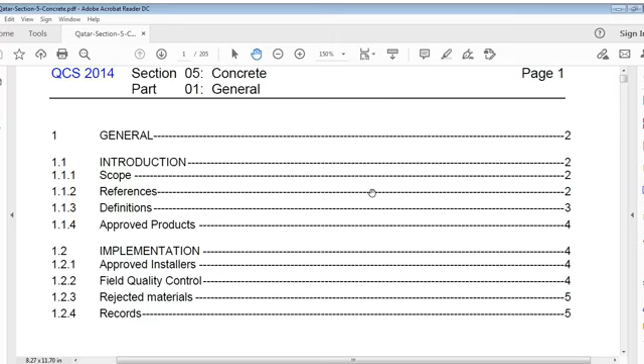This is the 2014 QCS, in which general introduction, scope, references, definitions, approved products, implementation, approved installers, field quality control, rejected materials, records, and then general are covered. This is part 1, section 5, introduction.

This is the scope. The section includes requirements for concrete work for pipelines, roadworks, runways, structures, water retaining structures, foundations and bases for structures and equipment. This part includes relevant standards, definitions, abbreviations and requirements for testing, facilities, rejected materials and record keeping, and related sections are as follows:

Aggregates, cementitious materials, water admixtures, property requirements, concrete plants, transportation and placing of concrete, formwork, curing, reinforcement, construction joints, inspection and testing of hardened concrete, protective coatings of concrete, hot weather concrete, miscellaneous precast concrete, pre-stressed concrete, water retaining structures, general quality assurance and quality control, foundations and retaining structures, roadworks, drainage works, mechanical and electrical equipment.

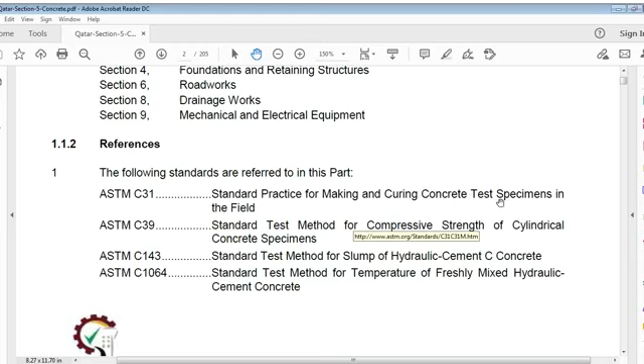References: the following standards are referred: ASTM C31 standard practice for making and curing concrete test specimens in field, ASTM C39 standard test methods for compressive strength of cylindrical concrete specimens, ASTM C143 standard test method for slump of hydraulic cement concrete, ASTM C1064 standard test method for temperature of freshly mixed hydraulic cement concrete.

BS6100 glossary of building and civil engineering terms, and then tests for general properties of aggregates, method of sampling, tests for general properties of aggregates, methods for reducing laboratory samples, method of sampling, fresh concrete site testing, fresh concrete slump test - this is important - and shape, dimension, other requirements, specimens and molds, making and curing specimens for some tests, and testing of concrete part 1, sampling of fresh concrete, testing part properties of fresh concrete, testing for part 3 making and curing test specimens.

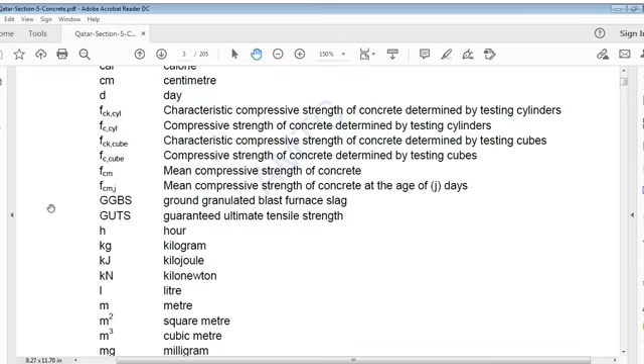Definitions: degrees Celsius, calorie, centimeter, D stands for day, FCK CYL characteristic compressive strength of concrete determined by testing cylinders, FCCYL compressive strength of concrete determined by testing cylinders, FCK cube characteristic compressive strength of concrete determined by testing cubes, and FC cube compressive strength of concrete by testing cubes, FCM mean compressive strength of concrete, FCMJ mean compressive strength of concrete at age J days, GGBS ground granulated blast furnace slag, GUTS guaranteed ultimate tensile strength.

H stands for hour, kg kilogram, kJ kilojoules, kN kilonewtons, L liter, M meter, M square meter, M cube cubic meter, mg milligram, min minute, mm millimeter, square millimeter, months, MPa megapascal, kPa kilopascal, MSRPC moderate sulfate resisting Portland cement, OPC ordinary Portland cement, PFA pulverized fuel ash, PVC polyvinyl chloride, S stands for second, SF silica fume, SRPC sulfate resisting Portland cement.

Ton is 1000 kilogram, ppm parts per million, micro is 10 to the minus 6, micrometer is 10 to the minus 6 meter.

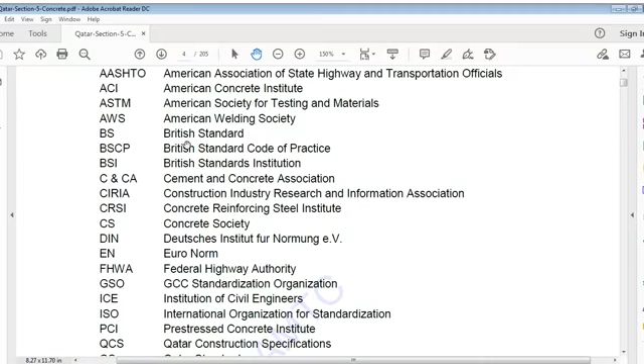Reference to Technical Society, Institution, Association of Governmental Authorities made in the text with the following abbreviations: AASHTO American Association of State Highways and Transportation Officials, ACI American Concrete Institute, ASTM American Society for Testing and Materials, AWS American Welding Society, BS British Standard, BSCP British Standard Code of Practice, BSI British Standard Institution, C&CA Cement and Concrete Association, CIRIA Construction Industry Research and Information Association, CRSI Concrete Reinforcing Steel Institute, CS Concrete Society, DIN Deutsches Institut für Normung, EN Euronorm, FHWA Federal Highway Authority, GSO GCC Standardization Organization, ICE Institution of Civil Engineers, ISO International Organization for Standardization, PCI Prestressed Concrete Institute, QCS Qatar Construction Specification, QS Qatar Standards, UK DfT United Kingdom Department for Transport.

Approved products: contract specification or contract specific documentation may identify approved products and approved or pre-qualified manufacturers and suppliers of concrete products. Implementation, approved installers.

Contract specific documents may identify approved or pre-qualified providers of concrete construction services.

Field quality control: contractor shall carry out test procedures required by this section and other tests, and test procedures shall be as directed by engineer from time to time. Test procedures shall be carried out using facilities of an approved independent testing laboratory. Supply, storage, sampling, testing of material shall be responsibility of contractor unless contract specifies otherwise.

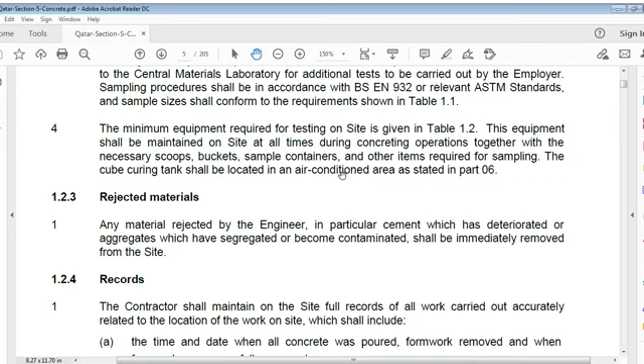This equipment shall be maintained on site at all times during concreting operations, together with necessary scoops, buckets, sample containers, and other items required for sampling. Cube curing tank shall be located in an air-conditioned area as shown in Part 6.

Rejected materials: material rejected by the Engineer, in particular cement which has deteriorated, or aggregates which have segregated or become contaminated, shall be immediately removed from site.

Records. Contractor shall maintain on site accurate records of all work carried out and the related location of work on site, which shall include the time and date when all concrete was poured, formwork removed, and when formwork props were fully removed, all cubes and other tests, and daily maximum minimum temperatures. One copy of the test shall be sent to the engineer immediately upon completion of the test.

Now this is the table we refer to, the last one: sampling procedures and minimum sample size for sample materials in the laboratory.

Cement, full range of tests: composite samples of 7 kg taken from at least 12 bags. Then aggregates, full range of tests: 200 kg.

For the full range we have to do sieve analysis, chemical analysis, soundness test, water absorption, particle density, flakiness index, fines content, and Los Angeles abrasion value, for this 50 kg.

There is a reinforcement tensile test, 500 mm length, bend test 300 mm. Then water, full range test, that's 5 liters.

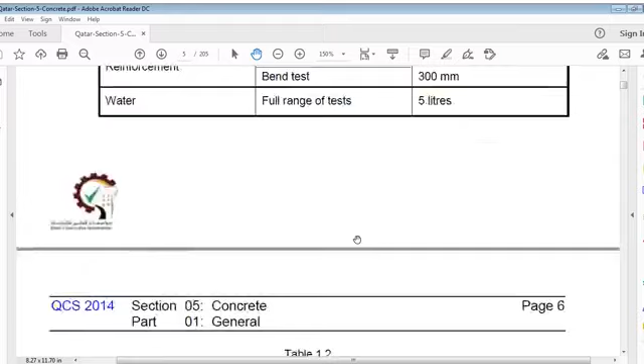It's according to Table 1, now Table 2: minimum testing equipment for each site. Test equipment to provide, minimum required.

Slump test: BS EN 12350-2, or GSO ISO 1920-2, or ASTM C143. Slump cone with base plate - 1, compacting rod with circular cross section and round ends - 1, remixing container 300 mm, ruler, moist cloth - 1, scoop and shovel, etc.

Cube making: BS EN 12390-1 and BS EN 12350-1, or GSO ISO 1920, or equivalent. 100 or 150 mm cubical or cylindrical molds, 6 numbers; compacting rod or bar, set of tools for assembling and stripping molds, 1 number; remixing container, 1 number; trowel, scoop, shovel and mallet; mold release agent and closed container with brush, 1.

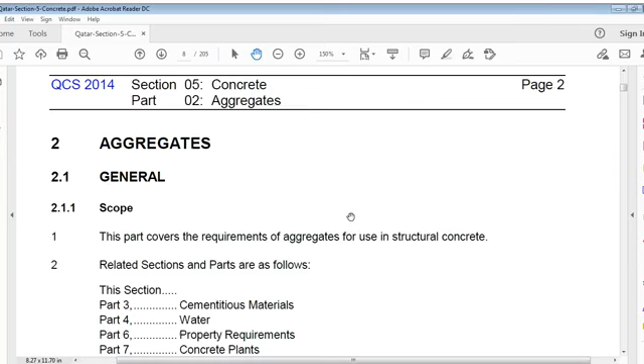Now we're going to aggregates. The general part covers requirements of aggregates for use in structural concrete. Related sections of parts are as follows.

Our references are ASTM standards - the numbers here you can read yourself: standard specification for concrete aggregates, test method for organic impurities of fine aggregates of concrete - ASTM C33, ASTM C40, ASTM C88 test method for soundness of aggregate using sodium sulfate or magnesium sulfate, ASTM C123 test method for lightweight pieces in aggregate.

ASTM C127 test method for specific gravity and absorption of coarse aggregate, ASTM C128 test method for specific gravity and absorption of fine aggregate, ASTM C131 test method for resistance to degradation of small-size aggregate by abrasion and impact in the Los Angeles machine.

ASTM C136 standard test method for sieve analysis of fine and coarse aggregate, ASTM C142 test method for clay lumps and friable particles in aggregates, ASTM C535 test method for resistance to degradation of large-size coarse aggregate by abrasion and impact in the Los Angeles machine.

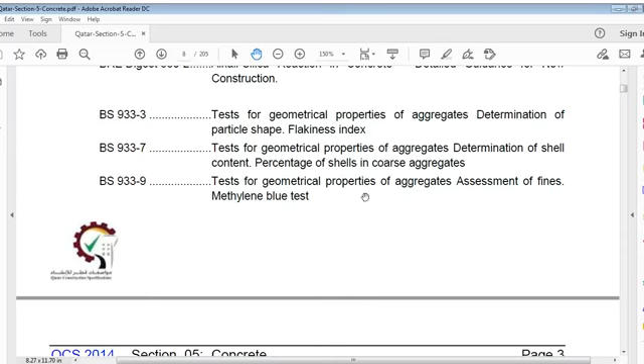BS 933-7: test for geometrical properties of aggregate, determination of shell content, percentage of shell in coarse aggregate. BS 933-9: test for geometrical properties of aggregate, assessment of fines, methylene blue test.

BS 933-11: test for geometrical properties of aggregate, classification test for constituents of coarse recycled aggregate. And BS EN 1097-6: test for mechanical and physical properties of aggregates, determination of particle density and water absorption.

BS 8500 Part 2: concrete complementary British standard to BS EN 206-1, specification for constituent materials and concrete. BS EN 12620: aggregates for concrete. BS EN 1744-1: tests for chemical properties of aggregates, chemical analysis. BS EN 1744-5: tests for chemical properties of aggregate, determination of acid-soluble chloride salts.

BSEN 1367-2 test for thermal and weathering properties of aggregate. Magnesium sulfate test, BSEN 1367 for determination of drying shrinkage. BSEN 933 test for geometrical properties of aggregate. BSEN 1097-2 test for mechanical and physical properties of aggregate.

Methods for determination of resistance to fragmentation. BSEN 1097-6 test for mechanical and physical properties of aggregate, determination of particle density and water absorption. BS EN 13055-1, lightweight aggregate for concrete, mortar and grout.

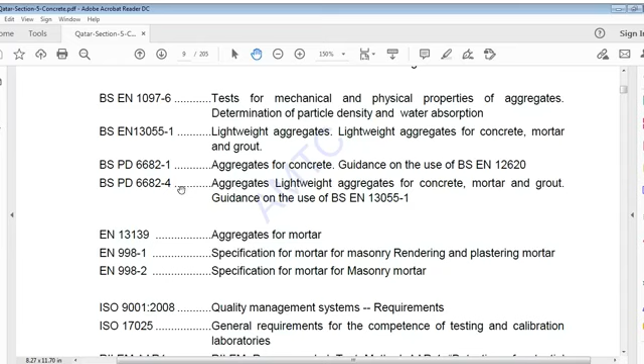BS PD 6682 published document means BS published document PD 6682-1, aggregate for concrete, guidance to use of BSEN 12620. BS PD 6682-4 aggregate, lightweight aggregate for concrete, mortar and grout, aggregates use of BSEN 13055.

EN 13139 aggregate for mortar. EN 998-1 specification of mortar for masonry, rendering and plastering mortar. Rendering and plastering, remember, rendering is external plastering and plastering is internal plaster. EN 998-2 specification for mortar for masonry mortar.

ISO 9001:2008 quality management system requirements was revised, so it's now 2015. ISO 17025 with general requirements for competence of testing and calibration laboratory.

RILEM recommended test for AAR1, detection of potential alkali reactive aggregates, petrographic method. RILEM AAR2 recommended test, AAR3 detection of potential alkali reactivity, 38-degree test method for aggregate combinations using concrete prisms.

Aggregate is granular material used in construction and may be natural, manufactured or recycled. Natural aggregate is from mineral sources which has been subject to nothing more than mechanical processing. Manufactured aggregate is of mineral origin resulting from an industrial process involving thermal or other modifications. Recycled aggregate results from processing of inorganic material previously used in construction.

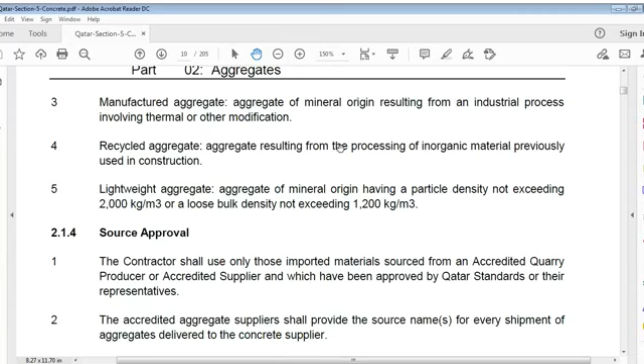Lightweight aggregate is of mineral origin having a particle density not exceeding 2000 kg per meter cube, or a loose bulk density not exceeding 1200 kg per meter cube.

Source approval. Contractor shall use imported materials sourced from an accredited quarry, producer or accredited supplier which have been approved by Qatar Standards or their representatives.

Accredited aggregate supplier shall provide source names for every shipment of aggregate delivered to the concrete supplier. Source of materials may be changed by contractor during the project provided that replacement material shall be sourced from an accredited quarry, and replacement materials are not significantly different in terms of physical and chemical properties, thus ensuring that resultant concrete continues to comply fully with the specified requirements.

When considering whether an aggregate supplier or aggregates producer is suitable to be accredited, preference will be given to organizations with a proper quality management system, such as ISO 9001, or another quality management system approved by Qatar Standards.

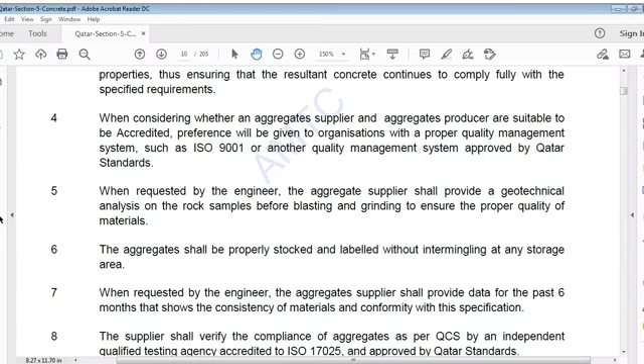When requested by engineer in charge, aggregate supplier shall provide a geotechnical analysis on rock samples before blasting and grinding to ensure proper quality of material.

Aggregates shall be properly stocked and labeled without intermingling at any storage area. When requested by engineer, aggregate supplier shall provide data for past 6 months that shows consistency of materials and conformity with this specification.

Supplier shall verify compliance of aggregates per QCS by an independent qualified testing agency accredited to ISO 17025 and approved by Qatar standards.

Sampling. Contractor shall provide samples of both fine and coarse aggregate to engineer in accordance with requirements of relevant standards in QCS for sampling, reduction and testing of aggregates, at least 2 weeks before beginning deliveries to site.

All samples shall be taken in presence of an engineer or an approved testing agency assigned by engineer. Aggregate sampling and tests shall be conducted by qualified staff.

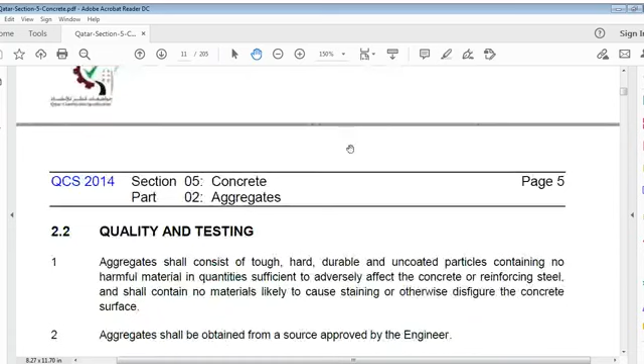Quality and testing. Aggregate shall consist of tough, hard, durable and uncoated particles containing no harmful material in quantities sufficient to adversely affect concrete or reinforcing steel, and shall contain no materials likely to cause staining or otherwise disfigure concrete surface.

Aggregate shall be obtained from a source approved by engineer. Aggregate shall meet the requirements in table 2.1, which we have already discussed.

Additional tests detailed as BSEN 12620 with BS PD published documents 6682, EN 13139, EN 998-1, EN 998-2, all relevant ASTM standards and codes of practice may be required by engineer to satisfy certain requirements.

Contractor shall provide all data as specified in QCS. Sampling of aggregate shall be carried out in accordance with the requirements of BSEN 932, BSEN 933, ASTM D75, ASTM C702.

Fine aggregate shall be natural sand or manufactured crushed rock sand. Crushed rock sand shall be a direct product of a manufacturing process, not a byproduct of coarse aggregate production.

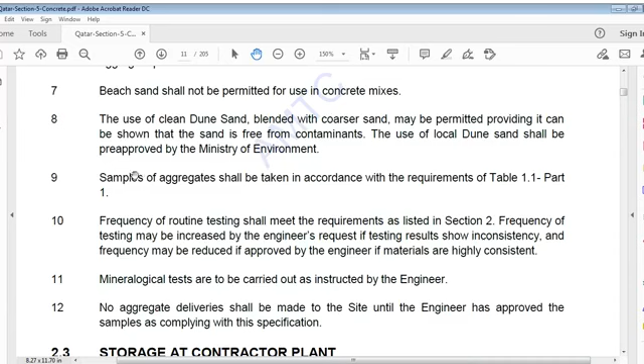Beach sand shall not be permitted for use in concrete mixes. Use of clean dune sand blended with coarser sand may be permitted, providing it can be shown that the sand is free from contaminants. Use of local dune sand shall be pre-approved by the Ministry of Environment.

Samples of aggregate shall be taken in accordance with requirements of Table 1.1, Part 1, as discussed already. Frequency of routine testing shall meet requirements listed in Section 2. Frequency of testing may be increased at the engineer's request if results show inconsistency, and may be reduced if approved by the engineer where materials are highly consistent.

Mineralogical tests are to be carried out as instructed by the engineer. No aggregate deliveries shall be made to site until the engineer has approved samples as complying with this specification.

Storage at contractor's plant. Aggregate shall be stored as follows: each nominal size of coarse aggregate and fine aggregate shall be kept separated and clearly labeled at all times. Height of stockpiles shall be controlled to prevent harmful segregation and breakage of aggregate. Stockpiles shall be on hard and clean surfaces with not more than 5% slope.

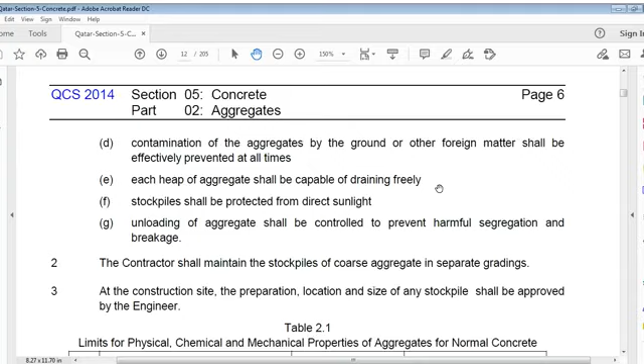5% slope, mind it, not 45, it's 5% slope for stockpiles — hard and clean surfaces with not more than 5% slope, for purpose of drainage etc. Contamination of aggregates by ground or other foreign matter shall be effectively prevented at all times. Each heap of aggregate shall be capable of draining freely. Stockpiles shall be protected from direct sunlight or shaded. Unloading of aggregate shall be controlled to prevent harmful segregation and breakage.

Contractor shall maintain stockpiles of coarse aggregate in separate gradings.

Separate gradings. Just a little, just a minute please — just a little tired because of my...

Unloading of aggregate shall be controlled to prevent harmful segregation and breakage. Contractor shall maintain stockpiles of coarse aggregate in separate gradings at the construction site. Preparation, location and size of any stockpiles shall be approved by the engineer.

Table 2.1: Limits for physical, chemical and mechanical properties of aggregates for normal concrete. This is a very important point.

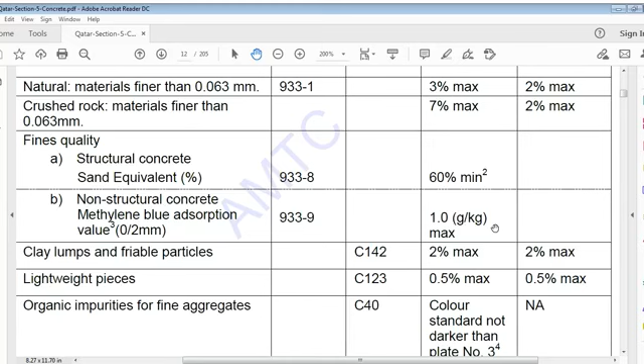Clay lumps and friable particles, ASTM C142, 2% maximum in both fine and coarse. Lightweight pieces, C123, 0.5% maximum in both cases. Organic impurities for fine aggregate, C40, color standard not darker than plate number 3, not applicable otherwise.

Water absorption, saturated surface dry, 10976: 2.3% maximum, 2% maximum. Particle density for normal weight concrete, 10976, 2 minimum particle density, and shell content.

Shell content, EN 933-7, 3% maximum, 3% maximum.

Flakiness index is a very important point. In 933 it is now 35% maximum, but in 1985 it was 25%, so it has increased. Maybe due to some reasons or non-possibility it was not possible to get 25% — I was there and it was 25% maximum at that time.

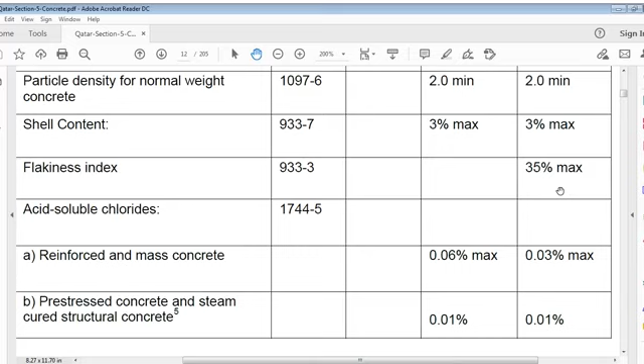For reinforced and mass concrete: 0.06% maximum and 0.03% maximum. This is acid soluble chlorides.

Pre-stressed concrete and steam cured structural concrete — it's a kind of autoclaving — 0.01% and 0.01%. Now, continuing with aggregates, acid soluble sulfate,

1744-1: 0.4% maximum and 0.3% maximum.

Soundness by magnesium sulfate, 5 cycles, 13672: 15% maximum and 15% maximum.

Resistance to fragmentation, Los Angeles abrasion, 10972: 30% maximum. Drying shrinkage,

13674: 0.075% maximum. Drying shrinkage, 0.075% maximum. Potential alkali reactivity, see note 6 below.

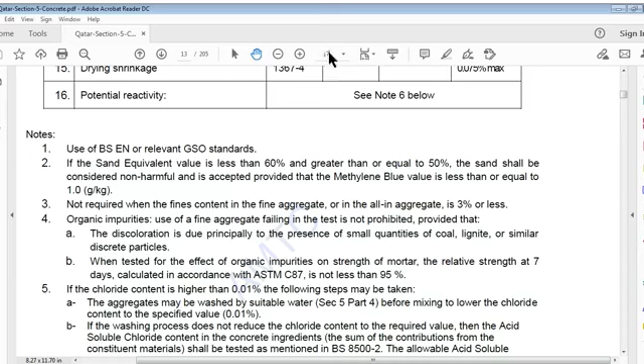Now it says in the notes: use of BSEN or relevant GSO standards. This GSO stands for Gulf Standard Organization. If sand equivalent value is less than 60% and greater than or equal to 50%, sand shall be considered non-harmful and is accepted, provided that methylene blue value is less than or equal to 1 gram per kilogram.

This is not required when fines content in fine aggregate or in all-in aggregate is 3% or less. Regarding organic impurities, use of a fine aggregate failing in the test is not prohibited provided that discoloration is due principally to the presence of small quantities of coal, lignite or similar discrete particles. When tested for effect of organic impurities on strength of mortar, relative strength at 7 days, calculated in accordance with ASTM C87, is not less than 95%.

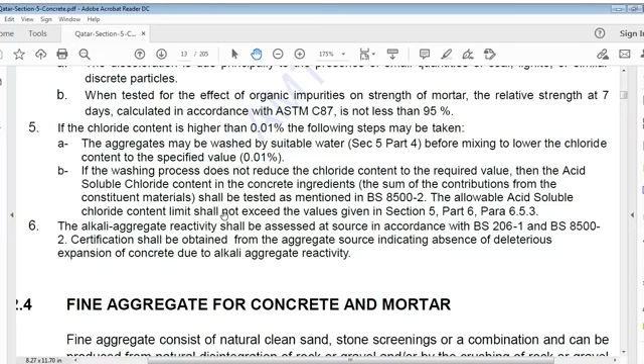If chloride content is higher than 0.01%, the following steps may be taken: aggregate may be washed by suitable water before mixing to lower chloride content to the specified value of 0.01%.

If the washing process does not reduce chloride content to the required value, acid soluble chloride content in concrete ingredients, sum of contributions from constituent materials, shall be tested as mentioned in BS 8500-2. The allowable acid soluble chloride content limit shall not exceed values given in Section 5, Part 6, Para 6.5.3.

Now item 6 we were talking about here was regarding potential reactivity. Alkali aggregate reactivity shall be assessed at source in accordance with BS 206-1, BS 8500 Certification 2, BS 8500-2. Certification shall be obtained from the aggregate source indicating absence of deleterious expansion of concrete due to alkali aggregate reactivity.

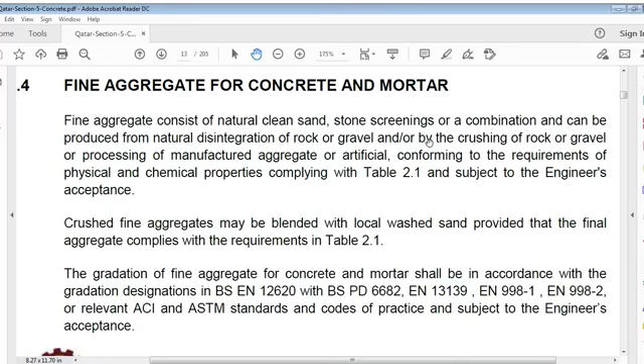Fine aggregate for concrete and mortar. Fine aggregate consists of natural clean sand, stone screenings - a combination that can be produced from natural disintegration of rock or gravel and/or by crushing of rock or gravel, or processing of manufactured aggregate or artificial aggregate conforming to requirements of physical and chemical properties complying with Table 2.1, as already discussed, and subject to engineer's acceptance.

Crushed fine aggregates may be blended with local washed sand, provided that final aggregate complies with requirements of Table 2.1 as discussed. Gradation of fine aggregate for concrete and mortar shall be in accordance with gradation designations in BS EN 12620, with BS PD 6682, EN 13139, EN 9981, EN 9982, or relevant ACI and ASTM standards and codes of practice, subject to engineer's acceptance.

Aggregates continued: each batch of aggregate delivered to site shall be kept separate from previous batches and shall be stored to allow for inspection and tests to be carried out. Local natural sand shall be mechanically washed to remove salts and other impurities in order to meet specified requirements.

Storage areas for clean wash sand shall be shaded from direct rays of sun and shall be screened for protection from dust. The area in the neighborhood of the stockpile and mixing plant shall be watered as necessary to reduce rising of dust.

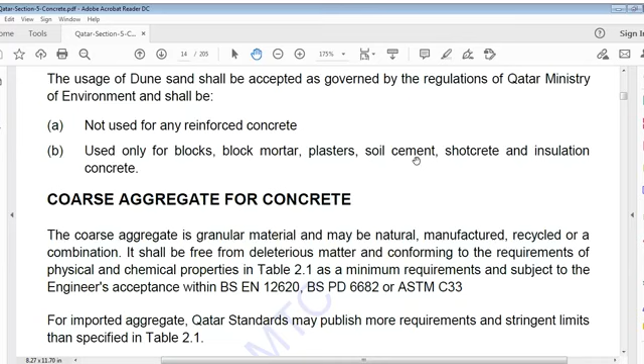Use of dune sand shall be accepted as governed by regulation of the Qatar Ministry of Environment and shall not be used for any reinforced concrete. It shall only be used for blocks, block mortar, plasters, soil cement, shotcrete and insulation concrete.

Coarse aggregate for concrete is a granular material and may be natural, manufactured, recycled, or a combination of all. It shall be free from deleterious matter and conform to requirements of physical and chemical properties per Table 2.1 as a minimum requirement, subject to engineer's acceptance, per BS EN 12620, BS PD 6682 or ASTM C33.

For imported aggregate, Qatar standards may publish more requirements and stringent limits than specified in Table 2.1. For other types of concrete mixes, and subject to engineer's acceptance, coarse aggregate shall comply with relevant BSEN or relevant ACI or ASTM standards and codes.

Nominal maximum size of coarse aggregate shall be not larger than: A, 1/5 the narrowest dimension between sides of forms; B, 1/3 the depth of slab; nor C, 3/4 the minimum clear spacing between individual reinforcing bars or wires, bundles of bars, individual tendons, bundled tendons, or ducts.

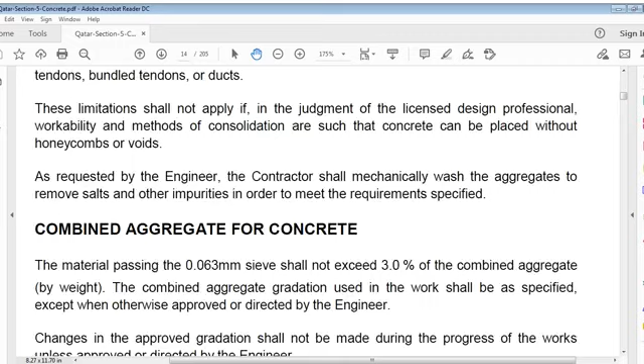These limitations shall not apply if, in the judgment of the licensed design professional, workability and methods of consolidation are such that concrete can be placed without honeycombs or voids, as requested by the engineer. The contractor shall mechanically wash aggregates to remove salts and other impurities in order to meet specified requirements.

Combined aggregate for concrete.

Materials passing the 0.063 mm sieve shall not exceed 3% of combined aggregate by weight. Combined aggregate gradation used in work shall be as specified, except when otherwise approved or directed by the engineer. Changes in approved gradation shall not be made during progress of work unless approved or directed by the engineer.

Washing and processing. Where aggregates have been washed shortly before delivery to site, or if stockpiles have been sprayed to cool them, samples of aggregate shall be taken frequently to determine the correct amount of water to add to the mix.

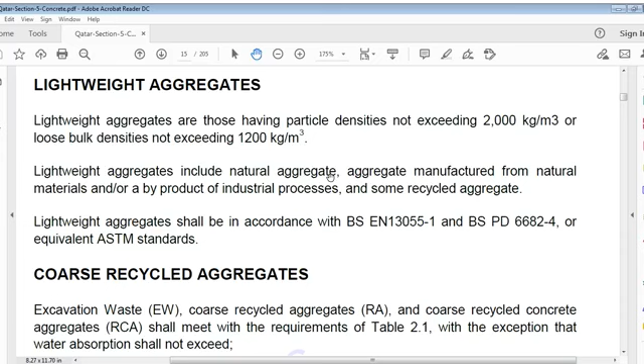Lightweight aggregate. Lightweight aggregates are those having particle densities not exceeding 2000 kg per meter cube, or bulk density not exceeding 1200 kg per meter cube. Lightweight aggregate includes natural aggregate, aggregate manufactured from natural materials and/or a byproduct of industrial process, and some recycled aggregate. Lightweight aggregate shall be in accordance with BS EN 13055-1 and BS PD 6682-4, or equivalent ASTM standards.

Coarse recycled aggregate. Excavation waste (EW), coarse recycled aggregate (RA), and coarse recycled concrete aggregate (RCA). So EW stands for excavation waste, RA stands for recycled aggregate, and RCA stands for coarse recycled concrete aggregate.

These shall meet the requirements in Table 2.1, with the exception that water absorption shall not exceed 3% for structural concrete, 4% for non-structural concrete. For structural concrete, EW (excavation waste) and RCA may be used in design concrete of maximum C30.

Its proportion shall be not more than a mass fraction of 20% of coarse aggregate, per BS 8500-2 section 6.2.2, except where approved by Qatar standards to use a higher proportion.

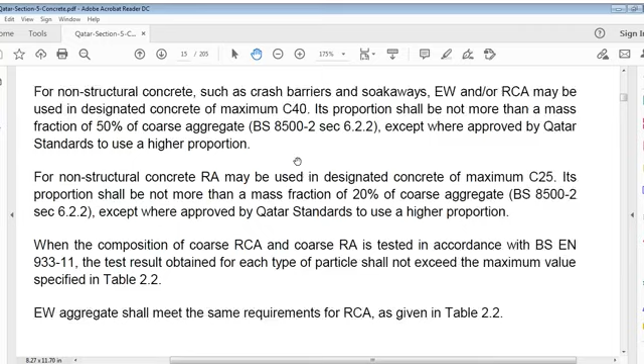For non-structural concrete, RA may be used in designated concrete of maximum C25. Its proportion shall not be more than a mass fraction of 20% of coarse aggregate, BS 8500-2 section 6.2.2, except where approved by standards to use a higher proportion.

When composition of coarse RCA and coarse RA is tested in accordance with BS EN 933-11, the test result obtained for each type of particle shall not exceed the maximum value specified in Table 2.2. EW aggregate shall meet the same requirements for RCA as given in Table 2.2.

Table 2.2 — let's see what this table is, because it's an important table. We have to understand it properly; it's not simply a table to read, because it contains requirements for coarse RCA and coarse RA by mass fraction percentage: type of aggregate, maximum masonry content, maximum fines, maximum lightweight materials, maximum asphalt, maximum foreign material (namely glass, plastic, metals), and maximum acid soluble sulfate SO3.

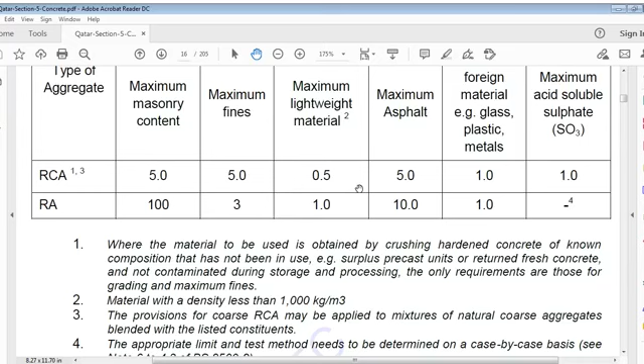For RA: maximum masonry content 100, maximum fines 3, maximum lightweight material 1, maximum asphalt 10, foreign materials (glass, plastics, metal, etc.) 1, and maximum acid sulfate as noted.

Where the material to be used is obtained by crushing hardened concrete of known composition that has not been in use — namely surplus precast units or returned fresh concrete — and not contaminated during storage or processing, the only requirements are those for grading and maximum fines, for material with a density less than 1000 kg per meter cube. Provisions for coarse RCA may be applied to mixtures of natural coarse aggregates blended with listed constituents; appropriate limits and test methods need to be determined on a case-by-case basis.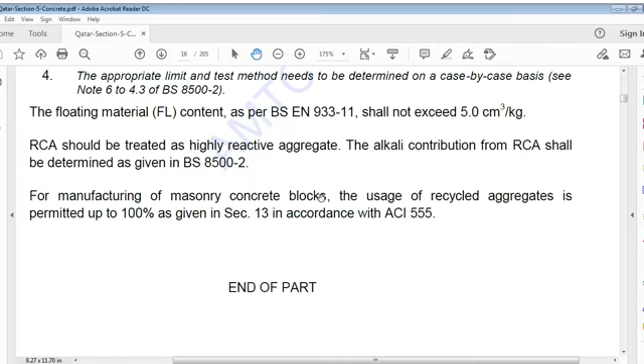Note 6 to clause 4.3, BS 8500-2: floating material (FL). Floating material content per BS EN 933-11 shall not exceed 5 cm cube per kilogram. RCA should be treated as a highly reactive aggregate; alkali contribution from RCA shall be determined as given in BS 8500-2.

For manufacturing masonry concrete blocks, use of recycled aggregate is permitted up to 100% in accordance with ACI 555. Now we go to cementitious material — cementitious material.

In this case, we have journal, that is scope, reference, terms and definitions, source approval, sampling, quality and testing, delivery, storage and handling. And we have here cementitious materials scope. This part covers requirements for testing and use of cement in structural concrete.

Property requirements are covered in relevant sections, specifically Part 6. References include ASTM C10 standard specification for natural cement, ASTM C91 specification for masonry cement, C114 test methods for chemical analysis of hydraulic cement, ASTM C115 test method for fineness of Portland cement by turbidimeter, C150 standard specification for Portland cement, C183 standard practice for sampling and amount of testing of hydraulic cement, and C188 test method for density of hydraulic cement.

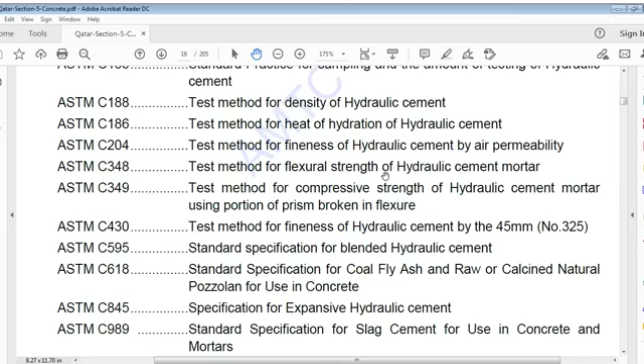ASTM C186 test method for heat of hydration of hydraulic cement, C204 test method for fineness of hydraulic cement by air permeability, C348 test method for flexural strength of hydraulic cement mortar, C349 test method for compressive strength of hydraulic cement mortar using portions of prisms broken in flexure, and C430 test method for fineness of hydraulic cement by number 325 sieve.

C595 standard specification for blended hydraulic cement, C618 standard specification for coal fly ash and raw or calcined natural pozzolan for use in concrete, C845 specification for expansive hydraulic cement, C989 standard specification for slag cement for use in concrete and mortars, C1157 standard performance specification for hydraulic cement, C1240 standard specification for silica fume used in cementitious mixtures, C1328 specification for plastic cement stucco, and C1329 specification for mortar cement.

British standards: BS146 Portland blast furnace slag cement, BS1370 low heat Portland cement, BS4027 sulfate resisting Portland cement, BS EN 196 methods for testing cement, BS EN 197-1 cement composition specifications and conformity criteria for common cements, and BS EN 197-4 cement composition specifications and conformity criteria for low early strength blast furnace cement.

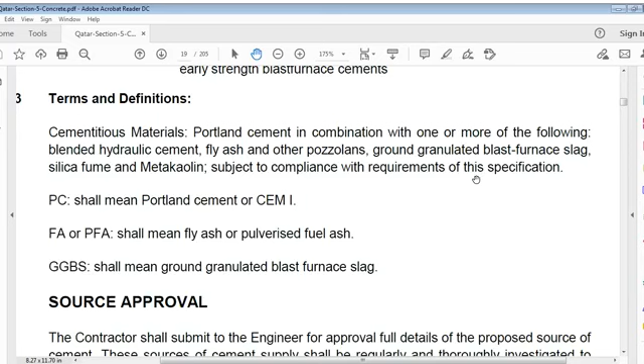Metakaolin, you know where it is - we have understood that in the clay section. Subject to compliance with requirements of this specification, PC shall mean Portland cement or CEM1, FA or PFA shall mean fly ash or pulverized fuel ash, and GGBS shall mean ground granulated blast furnace slag. Source approval.

Still, I'm trying to give this information because it's better to give, otherwise I'm very sick. I'm in bed, bedridden, just for information. Maybe for a couple of months I'll remain bedridden due to an accident. So excuse me if I'm not able to raise my voice because of the fatigue I've got. Still, I'm trying to pass on information to you which I passed long back, but now renewal is better.

Contractor shall submit to engineer for approval full details of proposed source of cement. The source of cement supply shall be regularly and thoroughly investigated to ensure that the quality of material supplied is satisfactory and does not deteriorate during performance of the project.

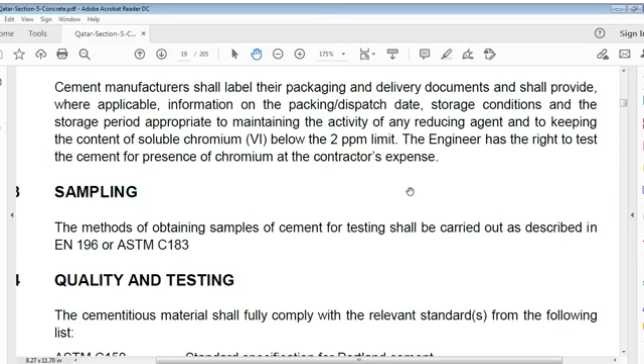Sampling: methods of obtaining samples of cement for testing shall be carried out per the description in EN 196 or ASTM C183.

Quality and testing: cementitious material shall fully comply with relevant standards from the following list - standard specification for Portland cement C150; C595 standard specification for blended hydraulic cement; C618 standard specification for coal fly ash and raw natural pozzolana for use in concrete; C989 standard specification for ground granulated blast furnace slag cement for use in concrete and mortars; ASTM C1157 standard performance specification for hydraulic cement; and C1240 standard specification for silica fume used in cementitious mixtures.

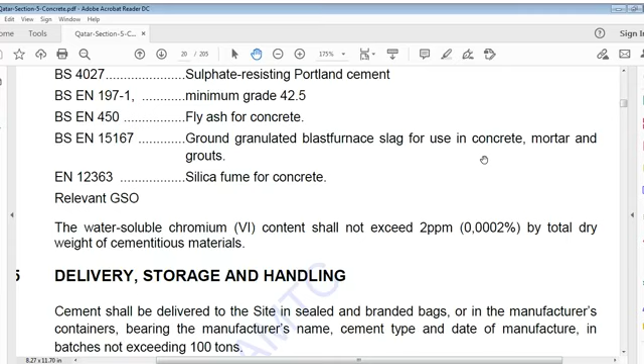BS146 Portland blast furnace cement, BS1370 low heat Portland cement, BS4027 sulfate resistant Portland cement, BS EN 197-1 minimum grade 42.5, BS EN 450 fly ash for concrete, BS EN 15167 ground granulated blast furnace slag for use in concrete, mortar and grouts, and EN 12363 silica fume for concrete.

Relevant GSO, that is Gulf Standards Organization, requirements: water soluble chromium content shall not exceed 2 ppm, that is 0.0002% by total dry weight of cementitious material.

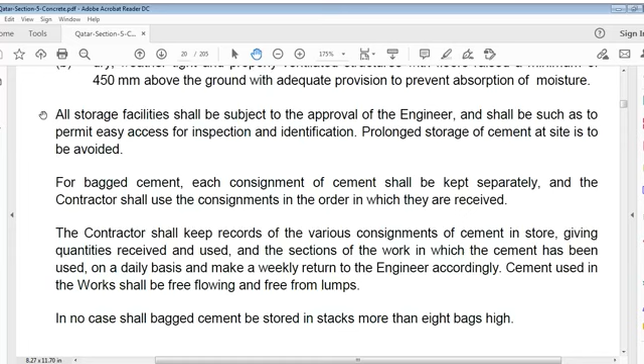All storage facilities shall be subject to approval of engineer and shall be such as permit easy access for inspection and identification. Prolonged storage of cement at site is to be avoided, meaning you should use it as soon as possible rather than keeping it stored for a long time. It is not recommended.

For bagged cement, each consignment of cement shall be kept separately and contractor shall use a consignment in order in which they are received. Contractor shall keep records of various consignments. Contractor, when I say contractor, this is a professional contractor who is expert on construction. Contractor shall keep records of various consignments of cement in store, giving quantities received and used, and sections of work in which cement has been used, on a daily basis, and make a weekly return to engineer accordingly.

Cement used in work shall be free flowing and free from lumps, free flowing and free from lumps.

This is very important. I repeat, contractors shall keep records of various consignments of cement in store, giving quantities received and used, and sections of work in which cement has been used, on a daily basis, and make a weekly return submitted to engineer accordingly. Cement used in works shall be free flowing and free from lumps. This is a very important part of quality control system, quality management system. If cement is rubbishly used, then everything is rubbishly done.

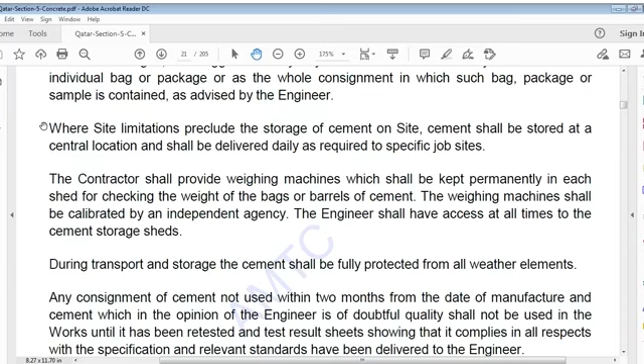Where site limitations preclude storage of cement on site, cement shall be stored at a central location and shall be delivered daily as required to specific job sites.

Contractor shall provide weighing machines which shall be kept permanently in each shed for checking weight of bags or barrels of cement. Weighing machines shall be calibrated by independent agency. Engineers shall have access at all times to cement storage sheds.

During transport and storage, cement shall be fully protected from all weather elements. Consignment of cement not used whatsoever within 2 months from date of manufacture, and cement which in opinion of engineer is of doubtful quality, shall not be used in works until it has been retested and test results showing that it complies in all respects with the specification and relevant standards have been delivered to engineer. Cement stored for longer than 28 days shall be tested for loss on ignition prior to use, to check for deterioration, and whatever cement which fails the test shall not be used in works.

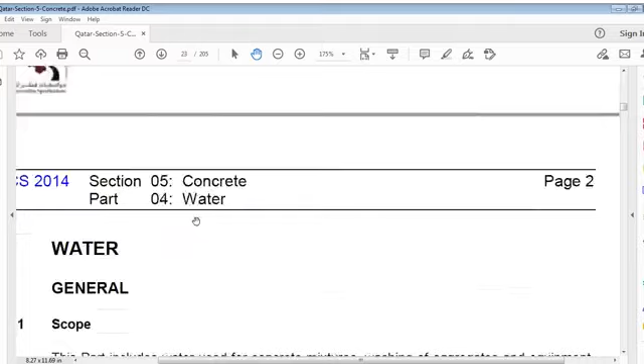Water. Very important part, water. Scope, reference, quality of water, which is general, pH of water, permissible temperature, supply and storage, testing and sampling, health and safety. Water.

Now water. This part includes water used for concrete mixtures, washing of aggregates and equipment, wetting of surface or ponding during curing, or for wetting formwork and washing reinforcement.

Related sections and parts are as follows: Part 2 aggregate, Part 6 property requirements, Part 9 formwork, Part 10 curing, Part 11 reinforcement.

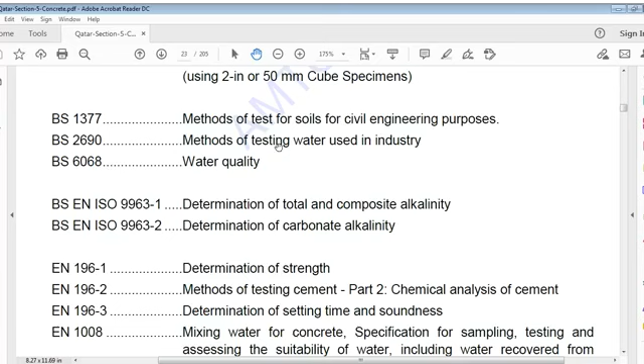References are ASTM C109, test method for compressive strength of hydraulic cement mortars using 2 in or 50 mm cube specimens; BS1377 methods of test for soils for civil engineering purposes; BS2690 methods of test for water used in industry; BS6068 water quality; BSEN ISO 9963-1 determination of total and composite alkalinity; BSEN ISO 9963-2 determination of carbonate alkalinity.

EN196-1 determination of strength. EN196-2 methods of testing cement, part chemical analysis of cement. EN196-3 determination of setting time and soundness.

EN1008 mixing water for concrete, specification for sampling, testing and assessing suitability of water, including water recovered from processes in the concrete industry, as mixing water for concrete.

SM5220B chemical oxygen demand. SM4500 standard methods for examination of water and wastewater. ISO 7890 water quality determination of nitrate, part 1 to 6, dimethyl-phenol spectrometric method. SM3125 B ICP-MS, methods by inductively coupled plasma mass spectrometry.

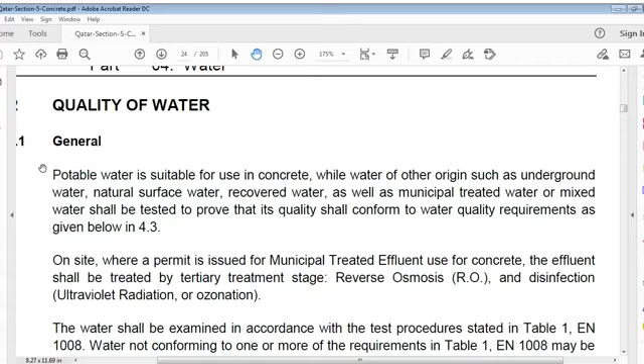Quality of water. Potable water is suitable for use in concrete, while water of other origin, such as underground water, natural surface water, recovered water, as well as municipal treated water or mixed water, shall be tested to prove that its quality conforms to water quality requirements given below in 4.3.

On site, where a permit is issued for municipal treated effluent use for concrete, effluent shall be treated by tertiary treatment stage, reverse osmosis (RO), and disinfection by ultraviolet radiation or ozonation.

Water shall be examined in accordance with test procedures stated in Table 1 of EN1008. Water not conforming to one or more requirements in Table 1 EN1008 may be used only if it can be shown to be suitable for use in concrete in accordance with physical tests of Table 4.1 below.

Site health and safety services and treated effluent quality shall fulfill requirements of clause 5. pH of water used in concrete work shall be as shown in Table 4.2.

Permissible temperature. Temperature of water for concrete shall not be less than 5 degrees Celsius and not more than 40 degrees Celsius. This point is very important.

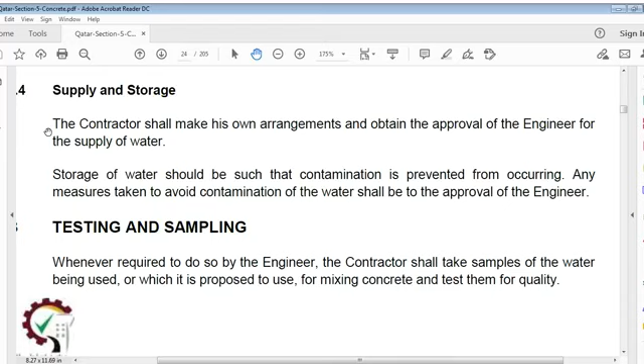Testing and sampling. Whenever required to do so by an engineer, the contractor shall take samples of water being used or proposed to be used for mixing concrete and test them for quality.

Samples of water not less than 5 liters shall be taken, sealed and sent for testing at an approved independent laboratory, prior to approval of whatever water source.

And whenever the source of water is changed periodically during continuance of its use, water of questionable quality should comply with physical tests of table 4.1.

No source of water, water of questionable quality, should comply with physical tests of table 4.1 and chemical limitations listed in table 4.2 and table 4.3. No source of water shall be used until required tests have demonstrated their suitability for concreting. Use of water from a municipal or government supply does not preclude the requirement for testing.

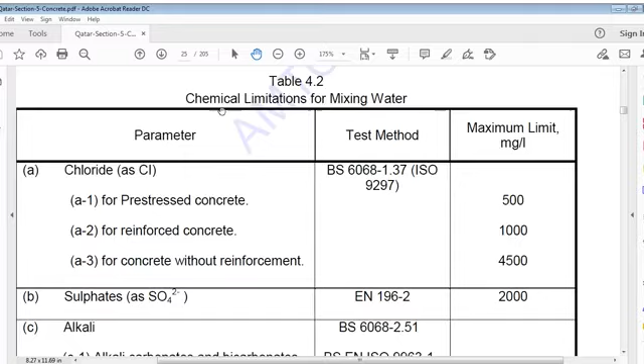Now sulfates, SO4, EN 196-2, that is 2000 milligram per liter. Alkali, BS 6068-2.51, which is alkali carbonates and bicarbonates, 500 milligram per liter, per BSEN ISO 9963-1 and BSEN ISO 9963-2. And alkali equivalent sodium oxides, EN 196-2, 1500 milligram per liter.

Now total dissolved ions, including A, B, and C above, BS1377 part 3. For pre-stressed concrete, 1000 milligram per liter. For reinforced concrete, 2000 milligram per liter. For concrete without reinforcement, 5000 milligram per liter. pH, BS 6068-2.50, 6.5 to 9, that's pH.

Table 4.3, maximum limit of harmful contaminants. Oh, I'm sorry, I'm just taking a moment.

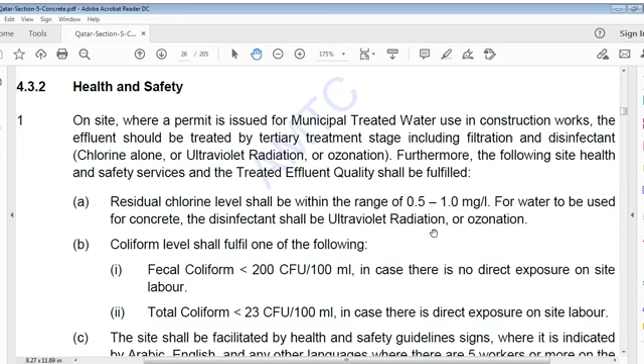On site, where a permit is issued for municipal treated water use in construction works, effluent should be treated by tertiary treatment stage, as discussed before, including filtration and disinfection — chlorine alone, or ultraviolet radiation, or ozone application.

Furthermore, following site health and safety services, treated effluent quality must fulfill: residual chlorine level shall be within the range of 0.5 to 1 milligram per liter. For water to be used in concrete, disinfectant shall be ultraviolet radiation or ozone application.

Coliform level shall fulfill one of the following: fecal coliform less than 200 CFU per 100 milliliter, in case there is no direct exposure of site labor. Total coliform less than 23 CFU per 100 milliliter, in case there is direct exposure of site labor — I call them workforce.

Sites shall be facilitated with health and safety guideline signs, indicated in Arabic, English, and other languages where there are 5 workers or more on site. The water not for human consumption must be noted. Sites shall be facilitated with health and safety equipment as well as personal protection equipment. Labor or workers shall follow health and safety guidelines and instructions and use their personal protection equipment.

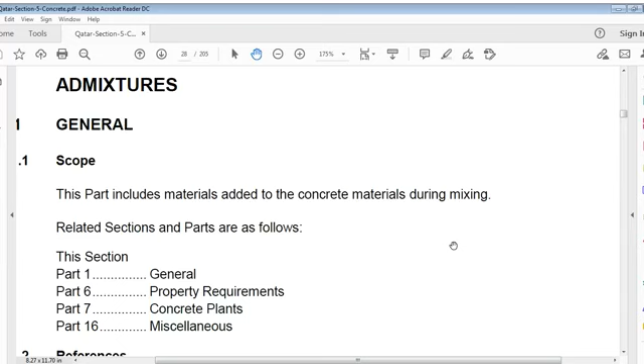Now, linked sections are general, then property requirements, concrete plants, miscellaneous, and codes are ACI 212.3R, report on chemical admixture for concrete; ACI 302, guide for concrete floor and slab construction; ACI 305, hot weather concreting; ACI 308, standard practice for curing of concrete.

ASTM C494, standard specification for chemical admixture for concrete; ASTM C1582, standard specification for admixtures to inhibit chloride induced corrosion of reinforcing steel in concrete; BS EN 934, admixture for concrete, mortar and grout, parts 2 and 6; BS EN 196, methods of testing cement; BS EN 14889, fibers for concrete, polymer fibers, definitions, specifications and conformity; NSF standard 61 definitions.

Now, admixtures are materials added during the mixing process of concrete to modify properties of the concrete mix in fresh and or hardened state.

Submittals: in addition to specified general requirements for approval of materials, approval of admixtures shall be subject to extensive trials to demonstrate suitability, adequacy of dosing arrangements, and performance.

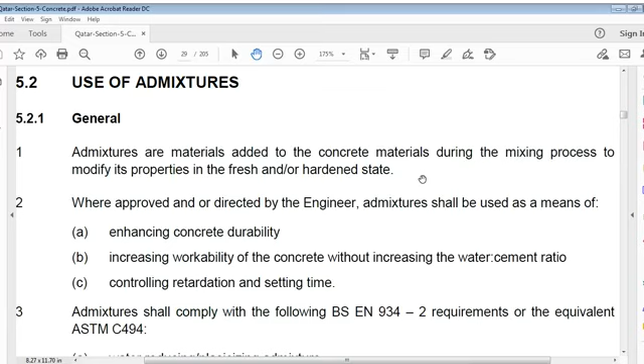Use of admixtures. Admixtures are materials added to concrete materials during the mixing process to modify properties in fresh or in hardened state.

Where approved and directed by engineer, admixtures shall be used as a means of: A, enhancing concrete durability; increasing workability of concrete without increasing water cement ratio; controlling retardation and setting time.

So what are these? Enhancing concrete durability is number one, which is very important. Durability is a very important property of concrete. Durability is included in reliability, and reliability equals safety plus serviceability plus durability. So durability is integrated within reliability itself.

And the second one is increasing workability of concrete without increasing water cement ratio, which is for fresh concrete. The best way is how to lay concrete without any problems, without any segregation.

Controlling retardation and setting time. Retardation and setting time. Okay, so these are major factors.

Now, admixtures shall comply with the following BS EN 934 requirements or equivalent ASTM C494: water reducing or plasticizing admixture.

Water reducing and plasticizing admixtures, where concrete becomes more fluid without addition of water, and can be pumped well. Pumping is a very important activity in the modern world.

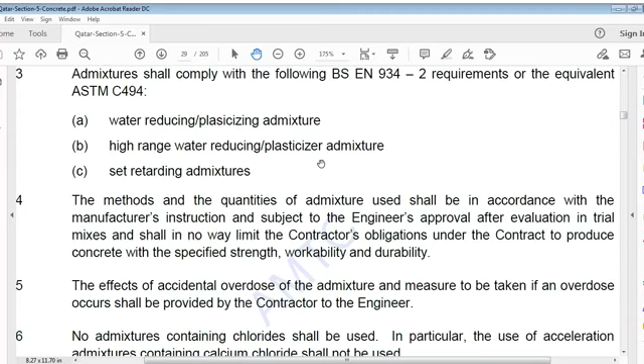And set retarding admixtures. Now, methods and quantities of admixture used shall be in accordance with manufacturer's instructions and subject to

engineer's approval after evaluation in trial mixes, and shall in no way limit contractor's obligation under contract to produce concrete with specified strength, workability, and durability.

This means ultimate responsibility, despite approval by engineer and approval by authorities, ultimate responsibility is owned by the contractor, who is responsible to deliver concrete with specified strength, workability and durability. Engineer's approval shall not come in any way.

Methods and quantities of admixtures used shall be in accordance with manufacturer's instructions and subject to engineer's approval after evaluation and trial mixes, and shall in no way limit contractor's obligations under contract to produce concrete with specified strength, workability and durability. Engineers should be clear with this provision very well, because misunderstanding must go.

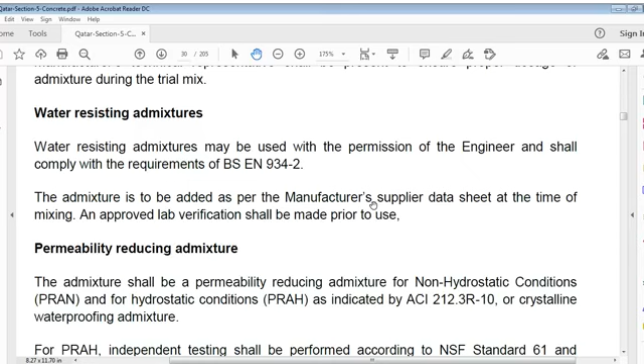Water resisting admixtures may be used with permission of the engineer and shall comply with requirements of BS EN 934-2. Admixture is to be added per manufacturer's supplier data sheet at the time of mixing. Approved lab verification shall be made prior to use.

Permeability reducing admixtures - this is a very important point. If you reduce permeability, concrete is better because it doesn't allow water to move in. Higher permeability means weak concrete, and minimum or lowest permeability level means good, durable concrete that can last long.

Admixture shall be a permeability reducing admixture, for non-hydrostatic conditions - PRAN - and for hydrostatic conditions - PRAH. PRAN is non-hydrostatic and PRAH is hydrostatic conditions, as indicated by ACI 212.3R-10, or a crystalline waterproofing admixture may be used.

For PRAH, independent testing laboratory verification shall be performed according to NSF Standard 61, and approval for use of waterproofing material on structures holding potable water shall be evidenced by NSF certification.

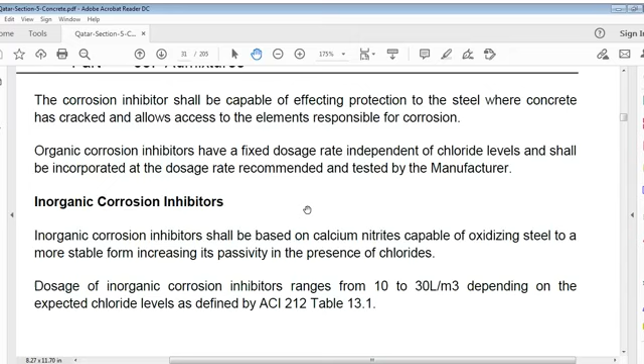Corrosion inhibitors shall be capable of providing protection to steel where concrete has cracked and allows access to elements responsible for corrosion. Organic corrosion inhibitors have a fixed dosage rate independent of chloride levels, and shall be incorporated at the dosage rate recommended and tested by the manufacturer.

Inorganic corrosion inhibitors - a very important point, practically used in piling particularly. Inorganic corrosion inhibitors shall be based on calcium nitrite, capable of oxidizing steel into a more stable form, increasing its passivity in the presence of chlorides.

Doses of inorganic corrosion inhibitors range from 10 to 30 liters per meter cube, depending on expected chloride levels defined by ACI 212 table 13.1. So 10 to 30 liters per meter cube of concrete - 10 is the minimum standard. Calcium nitrite has to be added in piling particularly, but can also be added to foundations.

So now, property requirements are an important point. Let us see how long this section is - 143. I'm not very strong today because of sickness, so I'll take a few minutes more.

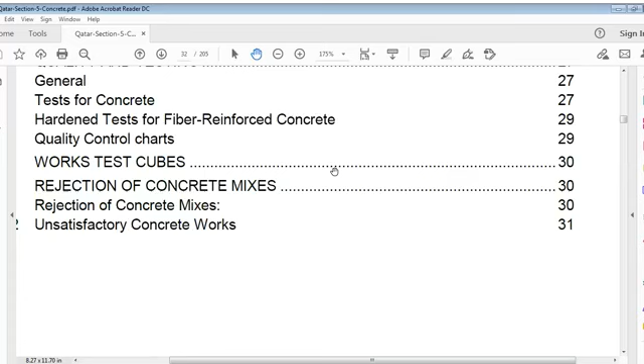Property requirements cover: general scope, references, definitions, submittals, exposure classes, reinforced concrete and sulfate classes, fresh concrete, general grades of concrete, durability requirements, maximum acid soluble chloride content, type of cementitious materials, resistance to alkali silica reaction, recommendations to resist reinforcement corrosion, recommendations to resist sulfate attack, durability related properties, design of concrete mixes, concrete trial mixes, quality and testing, general tests for concrete, hardened tests for fiber reinforced concrete, quality control charts, works test cubes, rejection of concrete mixes, and unsatisfactory concrete works.

So this is a very long one. Yeah.

Let's see how many more pages I can take in a few minutes.

This part includes grades 15 MPa and above, concrete to be used in civil works. The requirements for workability, permeability, and drying shrinkage are three important properties mentioned here.

Part 2 is linked to this one: aggregates, cementitious materials, water and admixtures, concrete plants, transportation and placing, concrete formwork, inspection and testing of hardened concrete — all are linked to concrete. So we move like this.

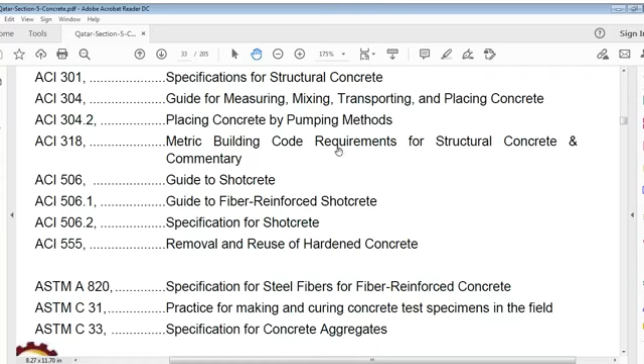ACI 237R-07 self-consolidating concrete, ACI 301 specifications for structural concrete, ACI 304R guide for measuring, mixing, transporting and placing of concrete, ACI 304.2 placing concrete by pumping methods, ACI 318M building code requirements for structural concrete with commentary, ACI 506R guide to shotcrete, ACI 506.1R guide to fiber reinforced shotcrete, ACI 506.2 specification for shotcrete.

ACI 555 removal and reuse of hardened concrete. ASTM A820 specification for steel fibers for fiber reinforced concrete. ASTM C31 practice for making and curing concrete test specimens in the field. ASTM C33 specification for concrete aggregates. ASTM C39 test method for compressive strength of cylindrical concrete specimens. ASTM C42 test method for obtaining and testing drilled cores and sawed beams of concrete. ASTM C94 specification for ready mixed concrete. ASTM C192 practice for making and curing concrete test specimens in the laboratory.

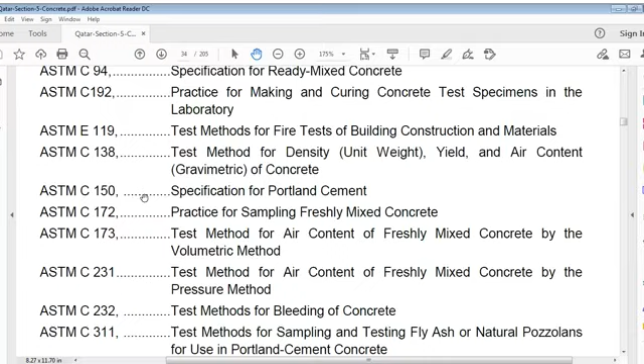ASTM E119 test methods for fire tests of building construction and materials. ASTM C138 test method for density, unit weight, yield and air content (gravimetric) of concrete. ASTM C150 specification for Portland cement. ASTM C172 practice for sampling freshly mixed concrete. ASTM C173 test method for air content of freshly mixed concrete by the volumetric method. ASTM C231 test method for air content of freshly mixed concrete by the pressure method.

ASTM C232 test method for bleeding of concrete. ASTM C311 test methods for sampling and testing fly ash or natural pozzolans for use in Portland cement concrete. ASTM C387 specification for packaged dry combined materials for mortar and concrete. ASTM C597 test method for pulse velocity through concrete. ASTM C617 practice for capping cylindrical concrete specimens. ASTM C618 specification for coal fly ash and raw or calcined natural pozzolan for use in concrete.

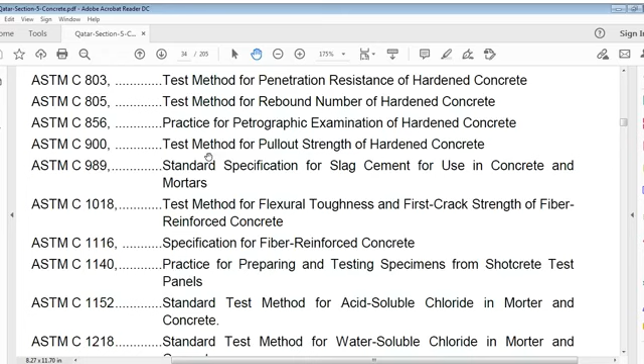ASTM C637 specification for aggregates for radiation shielding concrete. ASTM C638 descriptive nomenclature of constituents of aggregates for radiation shielding concrete. ASTM C803 test method for penetration resistance of hardened concrete. ASTM C805 test method for rebound number of hardened concrete. ASTM C856 practice for petrographic examination of hardened concrete. ASTM C900 test method for pull-out strength of hardened concrete.

ASTM C989 standard specification for slag cement for use in concrete and mortars. ASTM C1018 test method for flexural toughness and first crack strength of fiber reinforced concrete. ASTM C1116 specification for fiber reinforced concrete.

ASTM C1140 practice for preparing and testing specimens from shotcrete test panels. ASTM C1152 standard test method for acid soluble chlorides in mortar and concrete. ASTM C1218 standard test method for water soluble chloride in mortar and concrete. ASTM C1231 practice for use of unbonded caps in determination of compressive strength of hardened concrete cylinders. ASTM C1240 specification for silica fume used in cementitious mixtures.

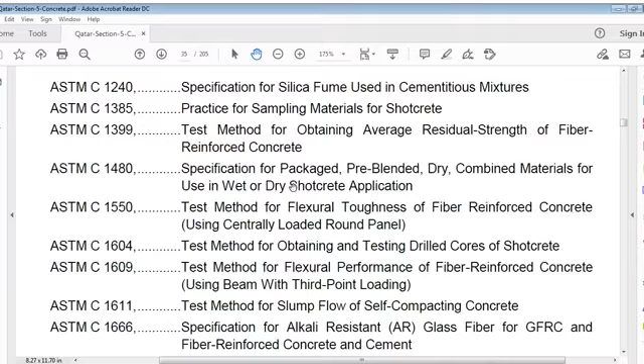ASTM C1385 practice for sampling materials for shotcrete. ASTM C1399 test method for obtaining average residual strength of fiber reinforced concrete. ASTM C1480 specification for packaged pre-blended dry combined materials for use in wet or dry shotcrete application. ASTM C1550 test method for flexural toughness of fiber reinforced concrete using centrally loaded round panel. ASTM C1604 test method for obtaining and testing drilled cores of shotcrete.

ASTM C1609 test method for flexural performance of fiber reinforced concrete using beam with third-point loading. ASTM C1611 test method for slump flow of self-compacting concrete. ASTM C1666 specification for alkali resistant glass fiber for GFRC and fiber reinforced concrete and cement. ASTM D5759 guide for characterization of coal fly ash and clean coal combustion fly ash for potential users. ASTM D6942 test method for stability of cellulose fibers in alkaline environments.

BRE Digest 433 recycled aggregate. BS 4027 specification for sulfate resistant Portland cement.

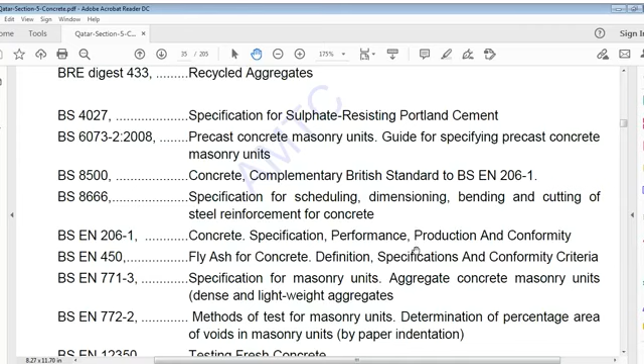BS6073-2:2008, precast concrete masonry units, guide for specifying precast concrete masonry units. BS8500 concrete, complementary British standard to BS EN 206-1. BS8666, specification for scheduling, dimensioning, bending and cutting of steel reinforcement for concrete. BSEN 206-1, concrete specification, performance, production and conformity. BSEN 450, fly ash for concrete, definition, specification and conformity criteria for fly ash.

BSEN 771-3, specification for masonry units, aggregate concrete masonry units, dense and lightweight aggregate. BSEN 772-2, methods of test for masonry units, determination of percentage area of voids in masonry units by paper indentation. BSEN 12350, testing fresh concrete. BSEN 12350-1, testing fresh concrete part 1, sampling. BSEN 12350-2, testing fresh concrete part 2, slump test.

BSEN 12350-3, testing fresh concrete part 3, Vebe test. BSEN 12350-4, testing fresh concrete part 4, degree of compactability. BSEN 12350-5, testing fresh concrete part 5, flow table test. BSEN 12350-6, testing fresh concrete part 6, density. BSEN 12350-7, testing fresh concrete part 7, air content pressure methods.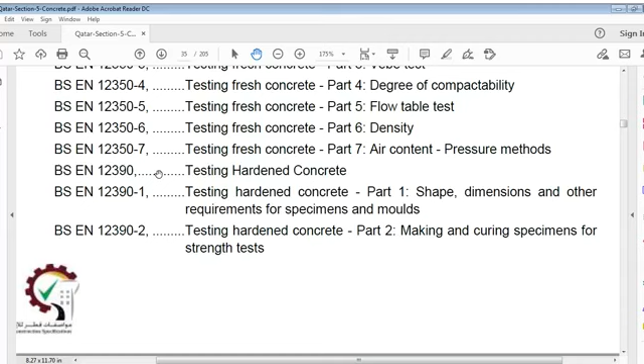BSEN 12390, testing hardened concrete. BSEN 12390 part 1, shape, dimensions and other requirements for specimens and molds. BSEN 12390 part 2, testing hardened concrete part 2, making and curing specimens for strength test.

BSEN 12390 part 3, compressive strength of test specimen. Part 4, compressive strength, specification for testing machines. Part 5, flexural strength of test specimen. Part 6, tensile splitting strength of test specimen. Part 7, density of hardened concrete. Part 8, depth of penetration of water under pressure.

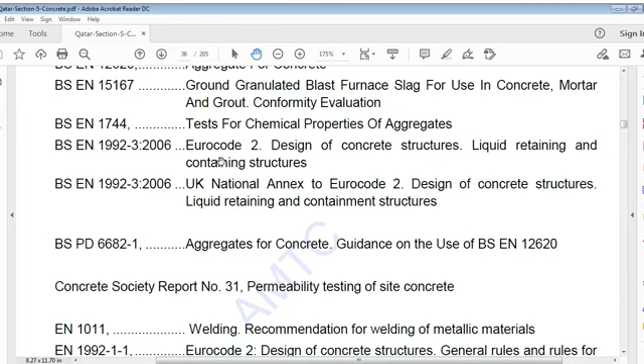BSEN 12620, aggregate for concrete. BSEN 15167, ground granulated blast furnace slag for use in concrete, mortar and grout, conformity evaluation. BSEN 1744, test for chemical properties of aggregate for concrete. BSEN 1992-3 2006, Eurocode 2, design of concrete structures, liquid retaining and containing structures. BSEN 1992-3 2006 UK National Annex to Eurocode 2, design of concrete structures, liquid retaining and containment structures.

BS PD 6682-1, aggregate for concrete, guidance on use of BSEN 12620. Concrete Society Report number 31, permeability testing of site concrete. EN 1011, welding recommendations for welding of metallic materials. EN 1992-1-1, Eurocode 2, design of concrete structures, general rules and rules for buildings.

GSO ISO 1920, GSO stands for Gulf Standards Organization. ISO 1920, testing of concrete part 1, sampling of fresh concrete. Part 2, properties of fresh concrete. Part 3, making and curing test specimens. Part 4, strength of hardened concrete. Part 5, properties of hardened concrete other than strength. Part 6, sampling, preparing and testing of concrete cores.

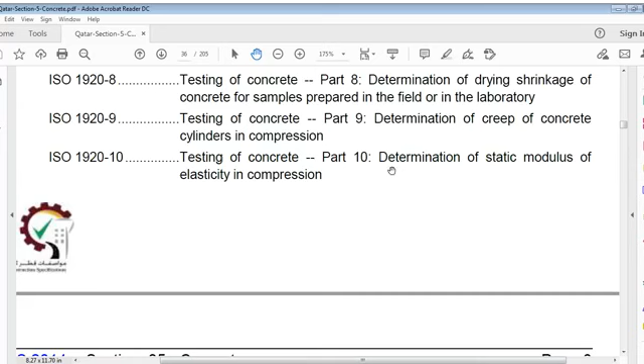GSO ISO 1920 part 7, non-destructive test on hardened concrete. ISO 1920 part 8, determination of drying shrinkage of concrete for samples prepared in field or in laboratory. ISO 1920 part 9, determination of creep of concrete cylinders in compression. ISO 1920-10, determination of static modulus of elasticity in compression.

CS TR11, concrete core testing, Concrete Society. RILEM CPC 11.3, absorption of water by immersion under vacuum. Concrete Society CS163, guide to design of concrete structures in the Arabian Peninsula. European guidelines for self-compacting concrete, specification, production and use.

Now, definitions. Exposure conditions shall apply as follows: class X0, class X1, class X2, class X3, class X4, class X5. Let's go through these one by one.

Class X0 means no risk of corrosion. No risk of corrosion or attack, no saline condition - blinding concrete, non-reinforced concrete or slab on ground. This is class X0. Class X1, mild exposure, non-saline conditions, dry or wet, rarely dry.

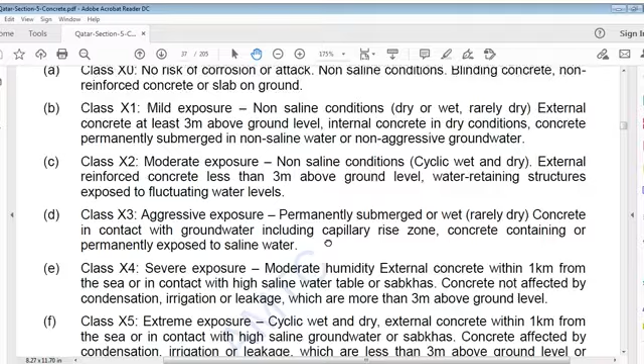External concrete at least 3 meters above ground level. Internal concrete in dry conditions. Concrete permanently submerged in non-saline water or non-aggressive groundwater. Class X2, moderate exposure, non-saline conditions, cyclic wet and dry, external reinforced concrete less than 3 meters above ground level.

Water retaining structures exposed to fluctuating water level. Class X3, aggressive exposure. This means permanently submerged or wet, rarely dry, concrete in contact with groundwater including capillary rise zone, or concrete containing or permanently exposed to saline water.

Class X4, severe exposure, moderate humidity: external concrete within 1 kilometer from sea or in contact with high saline water table, or sabkhas, meaning saline water table or sabkhas. Concrete not affected by condensation, irrigation or leakage, which is more than 3 meters above ground level.

Class X5, extreme exposure, cyclic wet and dry, external concrete within 1 kilometer from sea. Previously X4 was also within 1 kilometer from sea, or in contact with high saline groundwater or sabkhas.

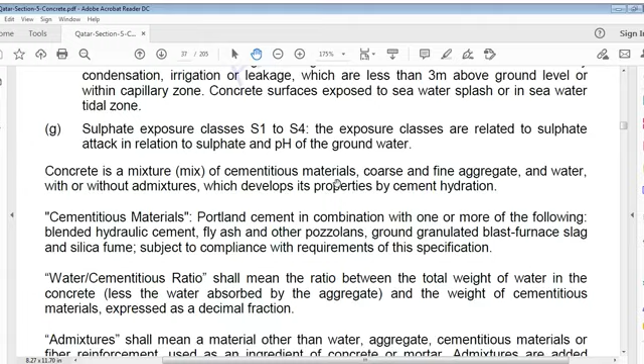Concrete is a mixture of cementitious materials, coarse and fine aggregate, and water with or without admixtures, which develops its properties by cement hydration. Cementitious materials include Portland cement in combination with one or more of the following blended hydraulic cements: fly ash and other pozzolans, ground granulated blast furnace slag, and silica fumes, subject to compliance with requirements of this specification.

Water cementitious ratio shall mean the ratio between total weight of water in concrete, less water absorbed by aggregate, and weight of cementitious materials, expressed as a decimal fraction. Admixtures shall mean a material other than water, aggregate, cementitious materials or fiber reinforcement used as an ingredient of concrete or mortar. Admixtures are added during the mixing process of concrete to modify properties of concrete in fresh and/or hardened state.

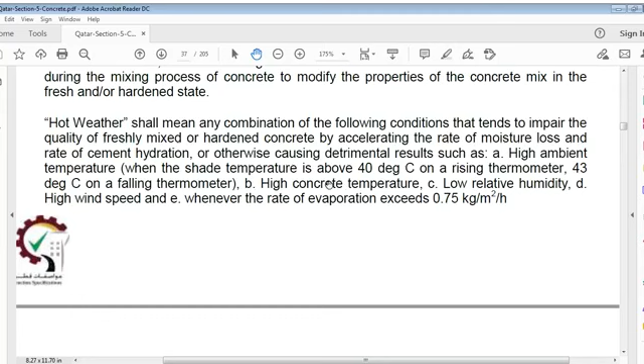Hot weather shall mean a combination of conditions that tends to impair the quality of freshly mixed or hardened concrete by accelerating the rate of moisture loss and rate of cement hydration, or otherwise causing detrimental results, such as high ambient temperature when shade temperature is above 40 degrees Celsius on a rising thermometer, or 43 degrees Celsius on a falling thermometer; high concrete temperature; low relative humidity; high wind speed; and whenever the rate of evaporation exceeds 0.75 kg per square meter per hour.

Mass concrete - let's clarify what it actually is, it's massive concrete, there's some confusion about this. It is defined as a volume of concrete with dimensions large enough to require measures to cope with generation of heat from hydration of cement and attendant volume change, to minimize cracking. Reinforced massive concrete structures include pile caps, transfer plates, and structural members where the least dimension exceeds 1.5 meters.

So this is for massive concrete, remember. There's also a thick element, not given here, where the least dimension is always more than 80 centimeters and the quantity is 8 cubic meters. In mass concrete it's more than 1.5 meters because it's a massive block, and there's no limit, always more than 8 cubic meters.

Coarse aggregate shall be considered as that size passing a 20 sieve or larger sieve and predominantly retained on a 4 sieve - meaning coarse aggregate passes through the 20 sieve and is predominantly retained on the 4 sieve. This means coarse aggregate should be between 4 and 20.

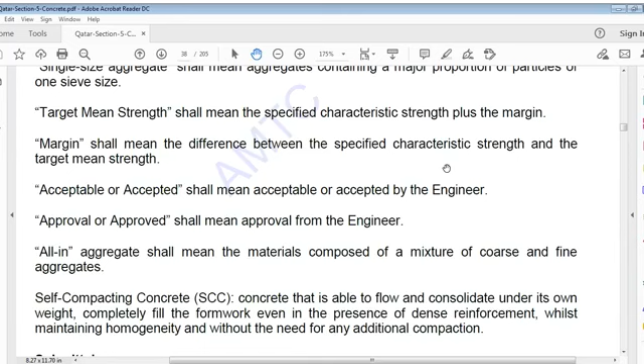Target mean strength shall mean specified characteristic strength plus margin. Margin shall mean the difference between specified characteristic strength and target mean strength. Accepted shall mean acceptable or accepted by engineer. Approval or approved shall mean approval from engineer. All-in aggregate shall mean materials composed of a mixture of coarse and fine aggregates.

Self-compacting concrete, SCC, is concrete able to flow and consolidate under its own weight, completely filling the formwork even in the presence of dense reinforcements, whilst maintaining homogeneity and without the need for any additional compaction.

Submittals: contractors submit details of mix designs to the engineer for approval, along with material safety data sheets, MSDS or equivalent, for all products. Test results and other information required to prove compliance with the specifications shall be submitted to the engineer for approval according to the relevant section of QCS, on at least the following products: cement.

Recent independent test results acceptable to the engineer confirming compliance with specified requirements and reference standards. Manufacturer certificates shall also be supplied for each batch of production of cement, or on a weekly basis, whichever is more frequent, certifying compliance with BS EN 197 or other equivalent standard.

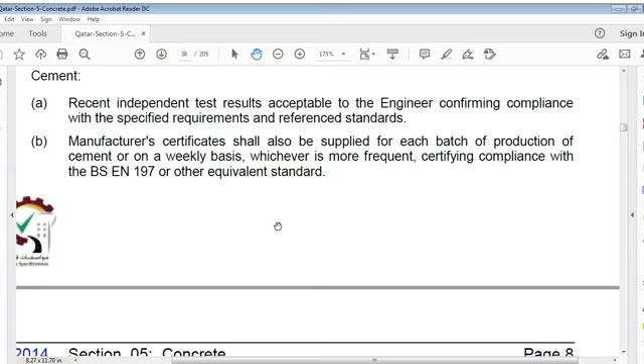Early compressive strength of each consignment of cement shall conform to requirements of QCS Part 3 at an independent site laboratory. Deviation of more than 10% from either the previous consignment value or rolling average shall be immediately reported to the engineer. Testing at an independent laboratory shall be as instructed by the engineer.

GGBS. Recent independent test results acceptable to the engineer confirming compliance with specified requirements of reference standards. Manufacturer certificate with information necessary to verify compliance shall also be supplied for each consignment of GGBS, or on a weekly basis, whichever is more frequent.

Early compressive strength of each consignment of GGBS shall be determined in accordance with BS EN 197 and BS EN 15167, or ASTM C989, at an independent site laboratory, based on a blend of 50% GGBS and CEM I. Deviation of more than 5% in strength from either the previous consignment value or rolling average shall be immediately reported to the engineer.

Previous consignment value or rolling average shall be immediately reported to the engineer. Testing at an independent laboratory shall be in accordance with BS EN 197 and BS EN 15167 standard and approved by the engineer. FA, that is fly ash.

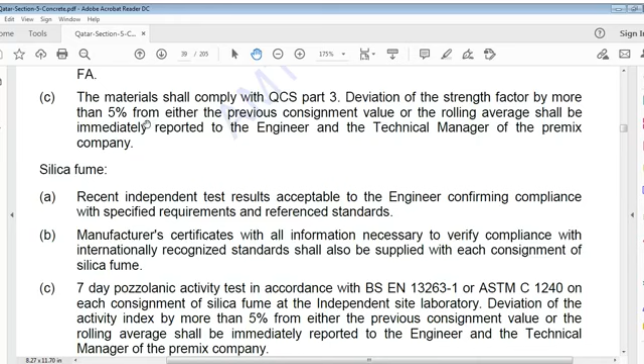Recent independent test results acceptable to the engineer confirming compliance with specified requirements of BS EN 450 or ASTM C618. Manufacturer certificates with all information necessary to verify compliance with internationally recognized standards shall also be supplied with each consignment of fly ash. Material shall comply with QCS Part 3. Deviation of strength factor by more than 5% from either the previous consignment value or rolling average shall be immediately reported to the engineer and technical manager of the premix company.

Silica fumes or microsilica. Recent independent results acceptable to the engineer confirming compliance with specified requirements and reference standards. Manufacturer certificate with all information necessary to verify compliance with internationally recognized standards shall also be supplied with each consignment of silica fumes. 7 days pozzolanic activity tests in accordance with BS EN 13263-1 or ASTM C1240 on each consignment of silica fumes at an independent site laboratory.

Deviation of activity index by more than 5% from either a previous consignment value or rolling average shall be immediately reported to the engineer and technical manager of the premix company.

Aggregate: recent independent test results acceptable to the engineer confirming compliance with specified requirements and reference standards. Full details of proposed sources of aggregates.

Water: recent independent test results acceptable to the engineer confirming compliance with specified requirements and reference standards.

Admixtures: recent trial results acceptable to the engineer illustrating efficiency of the product for its particular application. Tests on specific gravity and solids content shall be conducted at an independent site laboratory on each consignment.

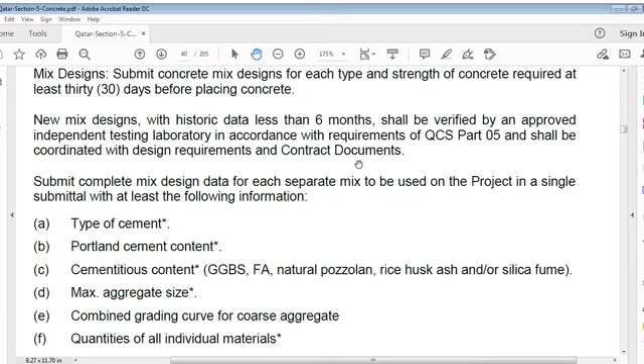Mix designs: submit concrete mix designs for each type and strength of concrete required at least 30 days before placing concrete. New mix designs with historic data less than 6 months shall be verified by an approved independent testing laboratory in accordance with requirements of QCS Part 5, and shall be coordinated with design requirements and contract documents.

Submit complete mix design data for each separate mix to be used on the project in a single submittal with at least the following information: type of cement, Portland cement content, cementitious content, GGBS, fly ash, natural pozzolana, rice husk ash or silica fumes, maximum aggregate size, combined grading curve for coarse aggregate, quantities of all individual materials, type of admixtures.

Target slump flow at discharge as per BS EN 12350-2, initial and final concrete setting times for each mix design per ASTM C403 or equivalent BS EN standards, with fresh density of concrete per BS EN 12350-6, air content per BS EN 12350-7.

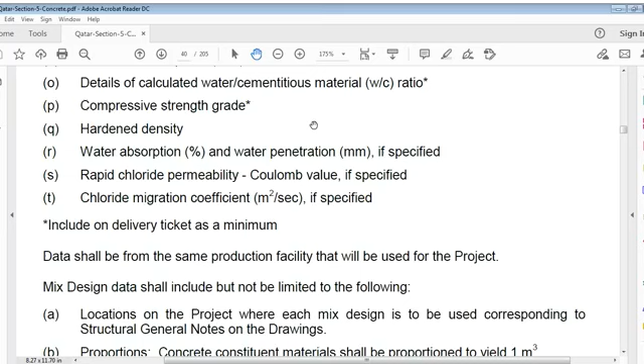Target temperature, bleeding, specified chloride and sulfate SO3 contents, details of calculated water cementitious material, water cement ratio, compressive strength grade, hardened density, water absorption percentage and water penetration in mm if specified, rapid chloride permeability coulomb value if specified, chloride migration coefficient in meter square per second if specified, included on delivery ticket as a minimum mark. Data shall be from the same production facility that will be used for the project.

Mix design data shall include but not be limited to the following: location on the project where each mix design is to be used, corresponding to structural general notes on drawings. Proportions: concrete constituent material shall be proportioned to yield 1 meter cube.

Submit standard test records, mix design materials, conditions, and proportions for concrete use for record, for tests, standard deviation calculations, and determination of required average compressive strength if required by the engineer.

If early concrete strength is required, contractor shall submit trial mix results as required. Test records to support proposed mixtures shall be no more than 12 months old and use current cement and aggregate sources. Test records to establish a standard deviation may be older if necessary to have the required number of samples.

Submit manufacturer's product data for each type of admixture. Submit manufacturer certifications that all admixtures used are compatible with each other. Submit all information indicating compliance with contract documents, including methods of placement and methods of curing.

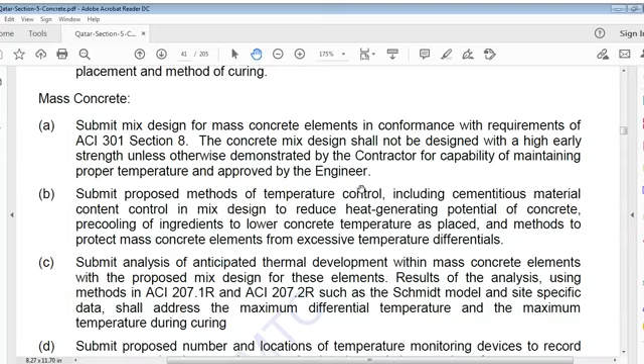Submit proposed methods of temperature control, including cementitious material content control in mix design, to reduce heat generating potential of concrete; pre-cooling of ingredients to lower concrete temperature as placed; and methods to protect mass concrete elements from excessive temperature differentials. Submit analysis of anticipated thermal development within mass concrete elements with proposed mix designs for these elements.

Results of analysis using methods in ACI 207.1R and ACI 207.2R, such as the Schmidt model and site specific data, shall address maximum differential temperature and maximum temperature during curing. Submit proposed number and locations of temperature monitoring devices to record temperature development between interior and exterior of mass concrete elements.

Now this is page 41 that so far I have reached out of these 205 pages. I think it's not possible for me at this stage to continue for long. It's already more than 2 hours and I'm tired because of my health conditions, so I could continue for a couple more hours, but due to my conditions I'm stopping here.